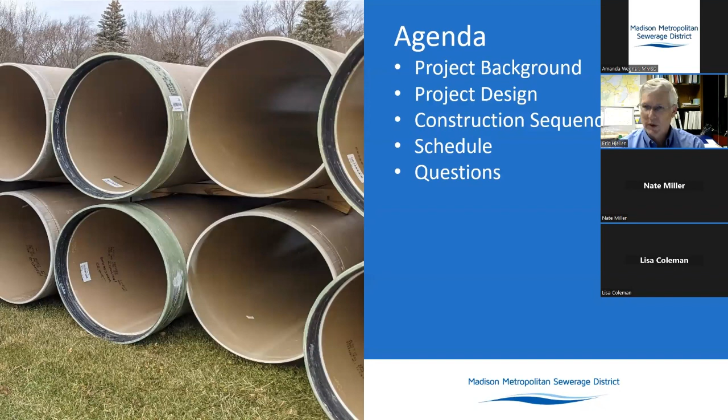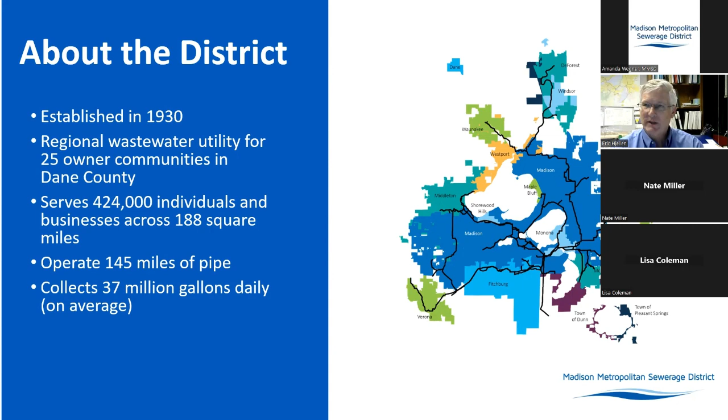Next, please. So a little bit about the district. We were created in 1930 by the state legislature. And we are not just Madison, but we serve area communities, 25 owner communities: Madison, Middleton, Fitchburg, Town of Dunn, McFarland, DeForest, several sanitary sewer districts. That includes over 400,000 individuals and businesses throughout the area. And we collect and treat on average about 37 million gallons of sewage daily. Next slide, please.

We own 145 miles of pipe. The pipe that we're working on with this project is part of the West Interceptor system. The West Interceptor system contains some of the oldest pipe in our entire network. The oldest pipe was built in 1916. That pipe is highlighted in orange in the map here. And then the pipe highlighted green, that was built in 1932.

And then over the years, there have been several extensions, reliefs, and replacements of the system. So a relief pipe is a pipe that typically is built parallel to an existing pipe in order to increase the capacity. A lot of times we'll keep the original pipe, and then we'll also have another pipe that's parallel to it or nearby somewhere. An extension is when we extend the pipe out to serve other areas. Next slide, please.

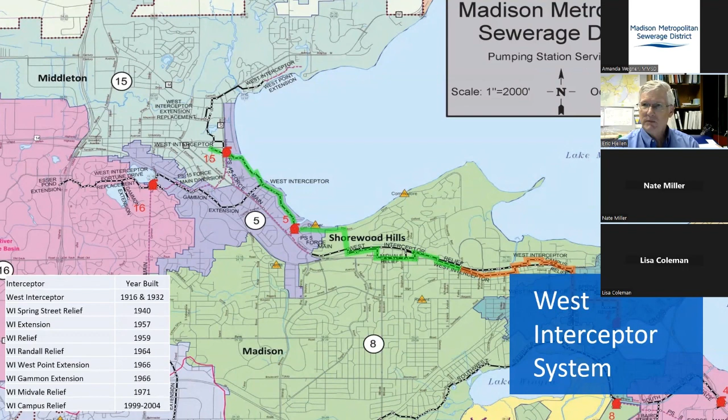Shoot, I'm blanking on what that stands for now.

Basically they look at all our pipes and all our system and tell us where capacity constraints might be. We don't have the text from the map, but the reason the pipe in red is red is because it's basically at capacity. It was at capacity and needed to be replaced immediately. We have replaced that already as part of phase 1.

The pipe in orange is pretty near term. I believe that was 2020 to 2025 it would reach capacity. And that is the pipe that we will be replacing in phases 2 and 3. Phase 2, by the way, has also already been done. It was done as part of the University Avenue project. And phase 3, as I said, would take place in 2 sections, one by the Shorewood Pool and another down by Highland Avenue. But Tom will talk about that and a few other things next.

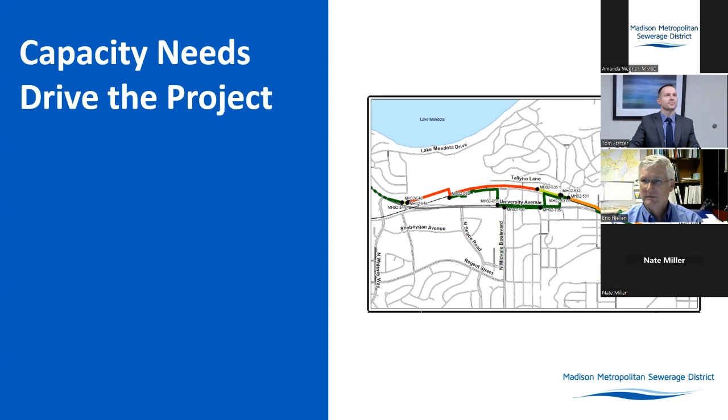Tom? Yeah, thank you, Eric. My name is Tom Stetzer. I'm the project manager for Strand Associates, leading the design work for the project underneath Eric. So Eric had mentioned the term interceptor sewer a couple different times. So what is an interceptor sewer? An interceptor sewer is a large diameter sanitary sewer pipe that conveys flows to the wastewater treatment plant. These pipes flow by gravity, and sometimes they're underneath roadways, sometimes they're in open, undeveloped areas.

The graphic at the bottom just shows how wastewater gets from your house or business all the way to the wastewater treatment plant. From your house, the wastewater leaves through pipes called laterals. Those go to local sewers, which are the smaller sewers out in front of your local streets. Those flow sometimes to pumping stations, other times larger sewers, and then eventually make their way into these interceptor pipes, which take the wastewater all the way to the wastewater treatment plant. In the transportation world, you hear the term interstate highways. You can think of interceptors as the interstate highways of the wastewater network.

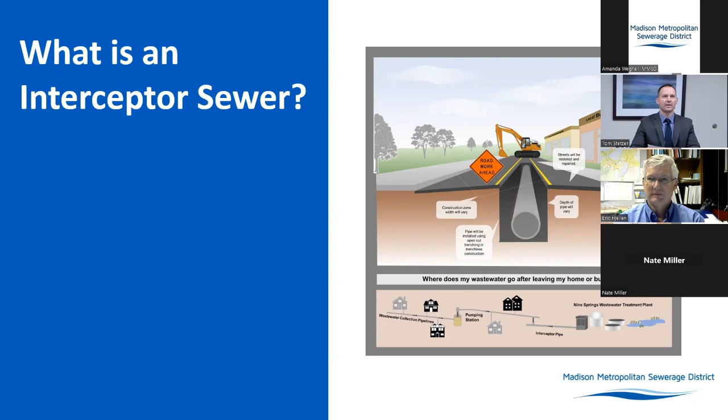All right, so how is an interceptor sewer installed? A couple different ways that can be accomplished. The most common way is up here on the top, which would be an open cut method. In that situation, the contractor digs a trench, pipe gets installed and then backfilled and restored.

A typical interceptor pipe is in the 10 to 25 foot range. There are sewers much deeper in the sewer network. For this project, that's about the right range that we expect to see on this job. The other type of installation method is a trenchless method. In that situation, when having to cross under maybe a busy highway or a railroad corridor, contractors can actually bore underneath those items to put a pipe in without digging a trench.

We had to do that for phase 2 as part of the University Avenue project, where we bored underneath the railroad tracks right in front of University Station.

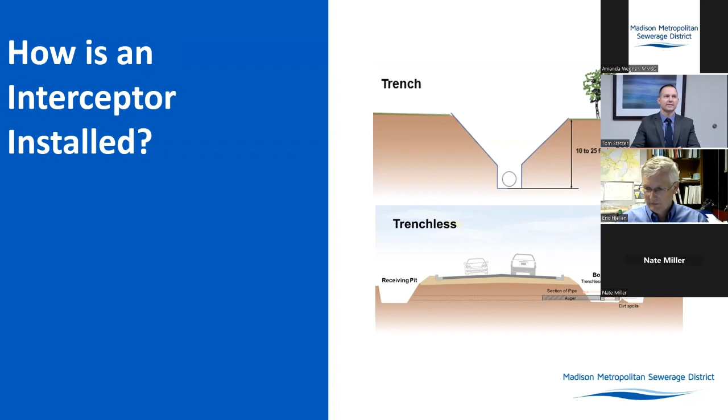All right, so zoom back out here, talk about the project phases and current status, and Eric started to touch on these items. So just a brief overview. The green line up there is the phase 1 limits, which was constructed in about 2022, starting on the west end at Indian Hills Park and ending just west of Shorewood Boulevard. So again, that's done and installed already.

And then jumping ahead to the pink pipe, that was phase 2. We did that in conjunction with the University Avenue roadway project, so that pipe was installed here last year. So that's done. And so here tonight, we're mainly going to be talking about phase 3, which is the blue pipes on this map, which is basically what's left within this project.

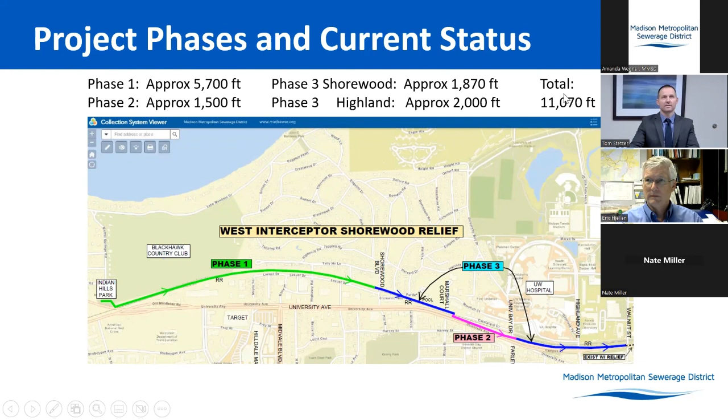So there's kind of 2 different areas. There's a section in the middle between Shorewood Boulevard and Marshall Court area. And then there's some additional pipe on the east end of the project, starting just east of Uni Bay Drive and ending just west of Walnut Street. So all in all, the project total had close to 2 miles of pipe as part of this network that we replaced.

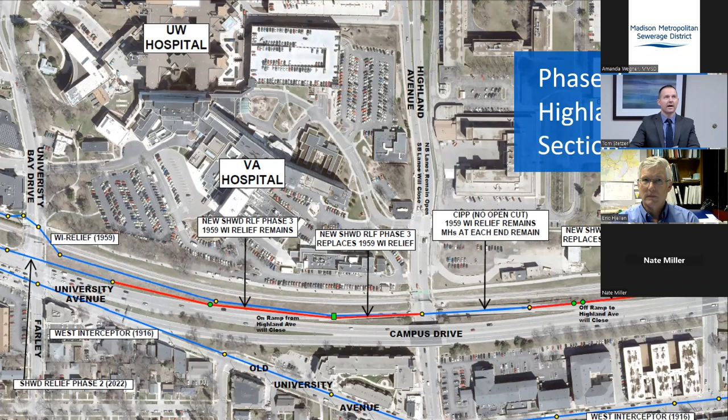Next, I'll talk about that middle section near Marshall Court and Shorewood Boulevard. Again, on this map, blue pipes are existing. There's 2 pipes out there today that were installed back in 1932 and 1959. In this section, we're going to be replacing the old 1932 pipe with a larger pipe. So again, 2 pipes out there today, 2 pipes will be out there when we're done, just one larger one.

The project limits, you can see here, there's a yellow box just west of Shorewood. That's where we started phase 1, so that's where we're going to be tying into. And then the pipe terminates for this phase down here, just in front of the University Station property. That's where we did the bore and jack underneath the railroad corridor, and that's what set us up to start this section.

The one thing I wanted to point out here near the pool area is that after a lot of discussion with the village and residents in the community, we think we found a way to hopefully save the large bur oak tree that's next to the pool that we know is important to many people.

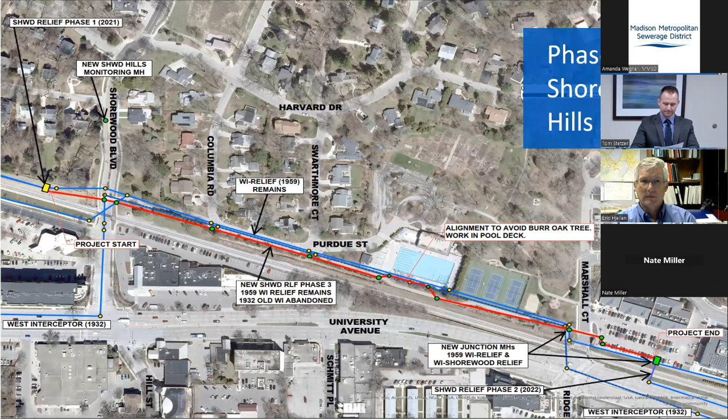All right, as with any construction project, there will be impacts to the general public. So I wanted to highlight a few of those items and maybe some things we're doing to try to minimize those as much as possible. So again, we're back at the east end of the project near Highland Avenue. And so one of the biggest impacts here is that there's going to be some closures of some of these roadways. And so the Campus Drive on and off ramp from Highland is going to be closed for a period of time. I'm going to talk a little bit more about details and potential timelines about that in a minute.

Then also on Highland Avenue, southbound Highland will have to be closed for a period of time. One positive is we should be able to maintain northbound Highland Avenue two lanes of traffic throughout the project. I mentioned that lining section that we are allowed to do due to capacities that are out there. So that's going to help us keep that northbound Highland traffic open throughout the project.

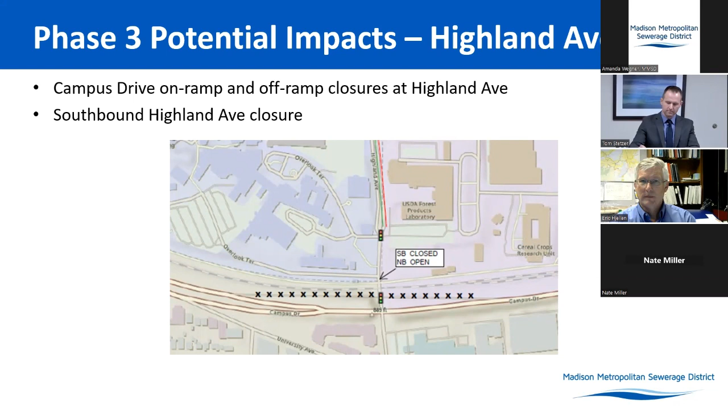Okay, now we're back to the Shorewood Hills area. So some of the impacts down here that we're going to see, we are going to have a temporary closure of Marshall Court just south of the University Station property. That'll hopefully be a fairly short-term closure. We're also going to have to close down Purdue Street for a period of time later next fall while we put the interceptor sewer in through there.

There will be a temporary detour of Shorewood Boulevard when we have to do our crossing. We have a couple larger manholes that have to go in the Shorewood area here. So there will be a fairly short detour for a period of time along Western Avenue. Another impact is we are going to have to detour the commuter trail. A very similar detour we're anticipating as the detour that was seen during the University Avenue project when the large bike path overpass was going in.

So that will have to be in effect while we're working, starting in this area here by University Station, and then all the way when we're digging along the pool. The existing pipe and the new proposed pipe, for the most part, goes right underneath that commuter trail. And then, with the pipe being dug in here with that open trench method, there is going to be a large impact to the existing landscaping along the trail here by the pool and park area.

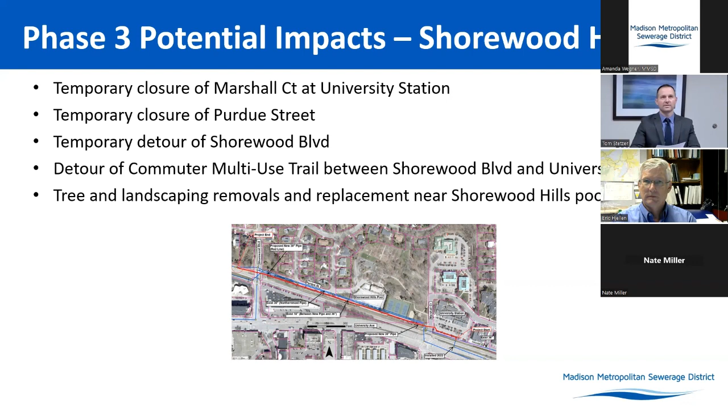And again, hoping to save that bur oak tree. We have an alignment to jog around that tree, but the rest of the vegetation and landscaping in this area will likely have to be removed, and I'll talk a little bit about what's going to go back here in a second. So for that landscaping plan, on our team, we have a certified arborist as well as a landscape architect. We've been working very closely with the Village of Shorewood staff, including the village forester and administrator.

We know this is very impactful. There's a lot of vegetation here and landscaping detail that went in when this bike path went in, which will have to be removed as part of our project. But again, we've worked closely in developing a new landscaping plan that the village so far is enjoying, and it's going to be a low maintenance plan, but get a lot of nice vegetation in there and landscaping to hopefully beautify the area, but also be a low maintenance solution for long-term needs for the village.

This is pretty zoomed out right now, a little bit on purpose, just because it is in very draft form right now. We've had a couple iterations of this that have gone back and forth between village staff and us for review. We're making some edits right now based on village comments, and then we're hoping to finalize this here in the next month. This will be included in the construction contract for the contractor to implement after the pipe is installed.

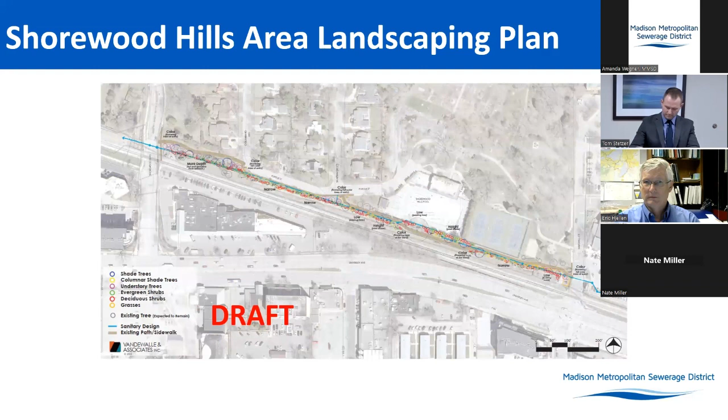All right, so how is this going to get constructed and in what general sequence? So we're talking about these different areas of the project. The tentative plan would be to bid this out here this winter. We're looking at starting at the east end of the project first, down in the Highland Ave area. Ideally, we're going to start that as soon as school is out, kind of in mid-May. So that'll be in the summer. Hopefully be done by early September, and then again, that area along Highland Avenue.

Once that's done, that should be about the same time as the Village of Shorewood Hills pool closing for the summer. So then we'll have the contractor move up there, work on that area between Marshall Court and Shorewood Boulevard while the pool is closed, so we're less impactful to that area and the parking lot for the pool. Some of that work may very well continue into cold weather months, with some of the restoration and things like that likely to occur early in 2025 when the weather warms up.

And so once we do that, what's going to be left is that small section by University Station. So that'll have an impact on the parking lot there at University Station. Again, we're tying on to that bore and jack section by the railroad tracks, and then crossing across Marshall Court, and then connecting back in where we started late summer of 2024.

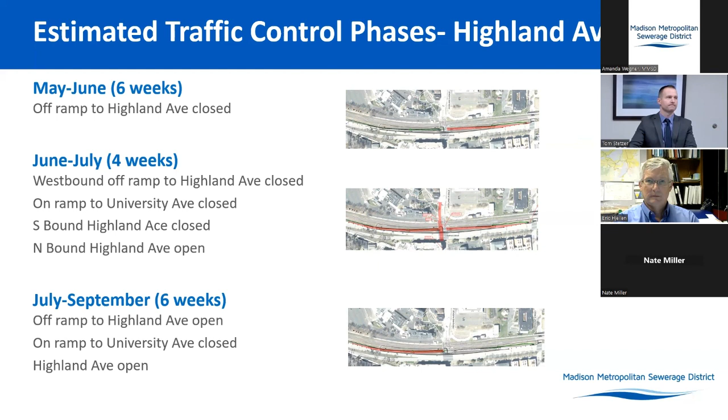So again, from a zoomed out perspective on the schedule, we're working on wrapping up final design right now, getting this bid out over the winter. And then, like I mentioned earlier, starting on the east end, hopefully in May, working our way from east to west through the Highland area. Construction would continue in fall in the Shorewood Hills area, partially into the winter, depending on cold weather and what the contractor can get done. And then wrapping up sometime in the summer of 2025 in the Marshall Court area.

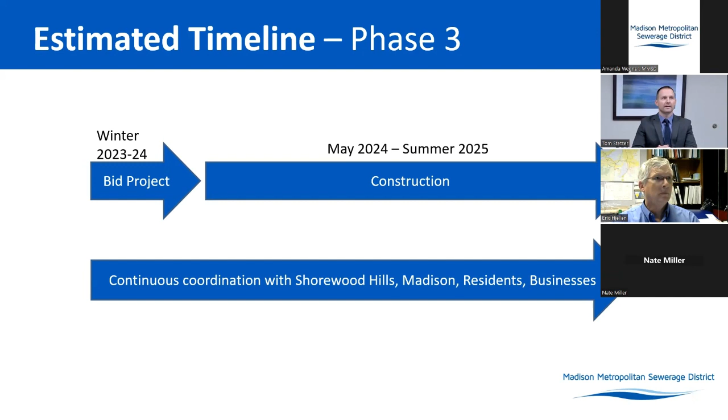Now I'll turn it back over to you, Eric, to wrap up the last couple of slides before we have any Q&A. You're still muted, Eric. Oh, Eric, I think you're still muted. Thank you. Yes, I was.

What I was saying, this slide shows the project webpage. It's on our website. The easiest way to get to it is to remember madsewer.org. Enter that in your browser and then go to, I believe it's What We Do. Looking at it right now. Yeah, What We Do, Current Construction Projects, and that'll get you to all of our current construction projects. And this one is the West Interceptor-Shorewood Relief.

As you can see, I believe this is almost the entire web page right now, so I'll be working on updating that. I don't know that there'll be a whole lot more text on there, but we have had previous public information meetings for phase 1 for the overall design. I believe we've had 2 or 3 public involvement meetings already. This presentation will also be made available on that webpage.